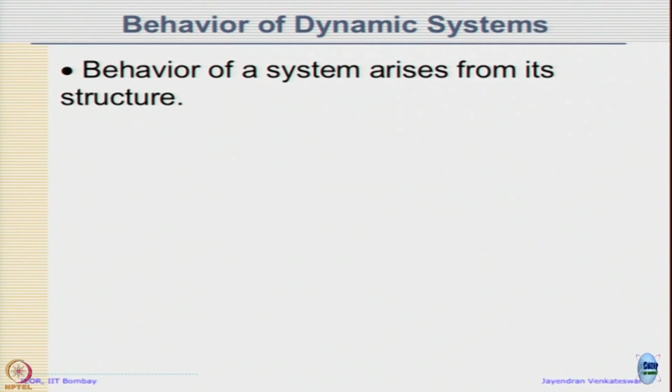The brief introduction I want to give today is on something called patterns of behavior, which is a follow-up on that. See, why we are trying to do system dynamics is because the behavior of a system arises from its structure. That is the fundamental idea we are trying out. We are not saying that the entire behavior of a system is exogenous. If you do that, then there is no need for solving any issues or trying to model a system.

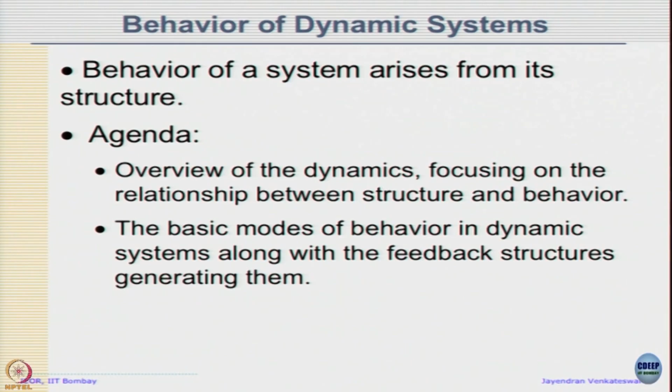We are trying to understand only because we know that the behavior of a system arises from its structure. So in this set of lectures, what we are going to do is overview the dynamics, look at what kind of dynamics actually are out there, how many types of graphs we can see, and based on that, is it possible to isolate or classify these dynamics. Surely people have already worked it out, and are there any generic structures in our causal diagrams that can be used to explain those dynamics. So that is what we are going to see.

Without much fanfare, these are the basic modes of behavior: exponential growth, goal seeking, S-shaped, oscillations, growth with overshoot, overshoot and collapse. Of these, exponential growth is very easy to imagine, and goal seeking and oscillations are very fundamental behaviors. A combination of these three is what results in other behaviors called S-shaped growth, growth with overshoot, and overshoot with collapse.

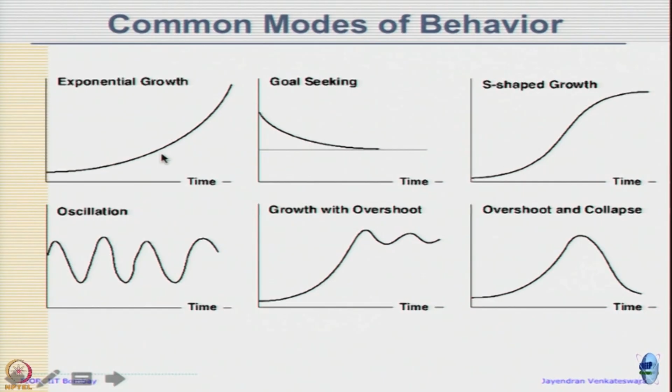That can be modeled using the same underlying structure that we use to model exponential growth. Let us quickly look at it. Exponential growth means there is a positive self-reinforcing feedback in the system. That means the state of the system is there and there is a net increase in the system, and that state of the system again contributes to the net increase rate, and that feeds on each other until it causes exponential growth.

A simple example could be, if you have a bank account, then interest keeps adding to the account and every year it accumulates. Though the amount may be small, if you leave it for 100 years, you will get a really large amount of money. So that is exponential growth. So the state of the system, if you plot it, you will get an exponential increase. It is common in many scenarios.

For example, if you are modeling the US GDP, the average growth rate is 3.45% per year and the doubling time is 20 years. US prison population, again as I told, if you draw the correlation it will be high, but that does not mean anything. Or world population, transistors per chip, or many other behaviors of biological systems.

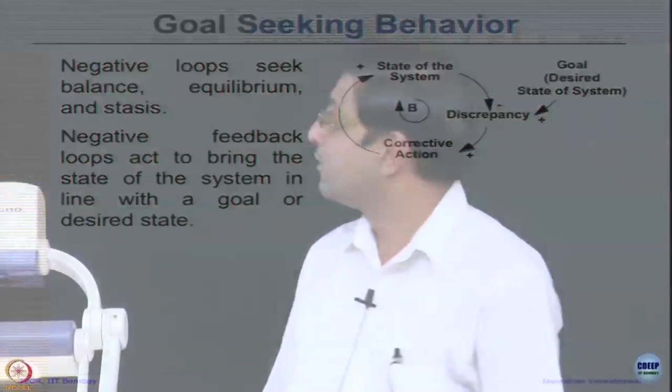So the general structure for goal seeking behavior is the graph we saw. Whenever there is goal seeking behavior, it means there has to be a goal—the title is self revealing. There is a goal, there is a desired state of system, there is an actual state, and based on the discrepancy I take corrective action, and I correct it until I reach the goal, whatever it is. So this negative feedback loop acts to bring the state of the system in line with the goal or the desired state that we want.

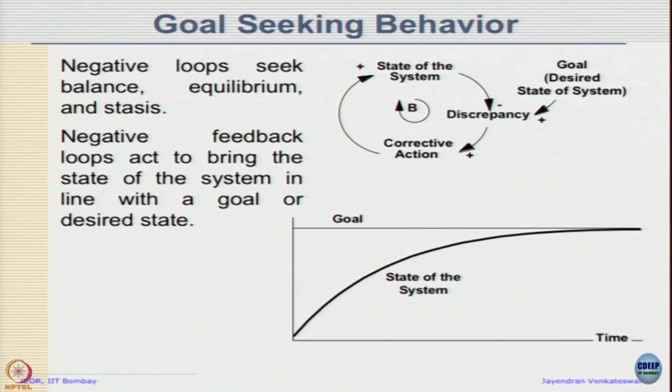It is quite intuitive, the behavior we can expect is something like this. The goal can be approached from the bottom to the top or from top to the bottom. There are nice examples, like semiconductor fabrication defect rate. If you model defect rate, it goes down exponentially—there is goal seeking behavior. Nuclear plant load factor can rapidly increase up to about 80% load, but after that it increases very slowly. Or television share of all advertising, or US traffic fatalities per vehicle. All these things show a kind of goal seeking behavior over time. Again, the x axis is time—we are looking at time changing behavior.

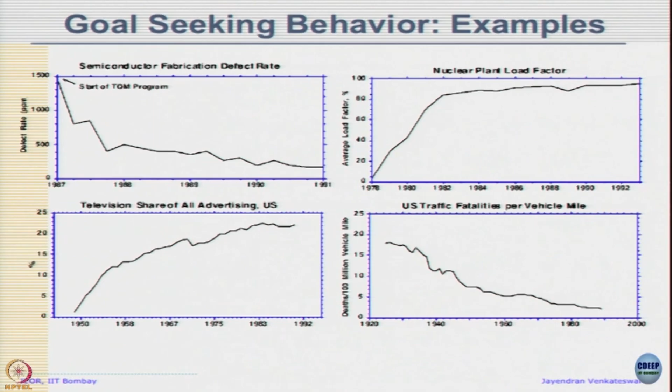The third fundamental mode is called oscillations. Like goal seeking behavior, oscillations are also caused by negative feedback loops, but something is constantly changing—that is what oscillations mean.

The very simple modeling construct that causes fluctuations is the presence of delays in the system. If you do not know the current state precisely, you assume something and take corrective action, and that action takes some time before it affects the state of the system. It also takes time for you to observe the state of the system, identify the gaps, and decide which corrective action to take. All these delays make us overshoot our goal, then go below the goal, then take corrective action again, go above the goal, etc. So we end up oscillating over time.

So overshoot arises from the presence of significant time delays in the negative loop. When you observe systems whose graphs show oscillating behavior, you should understand there are significant time delays involved. Let us try to identify those time delays—what is causing the delay, how we can reduce it, or just identify it. Right now we are not prescribing action, we are only trying to understand and discover what is happening.

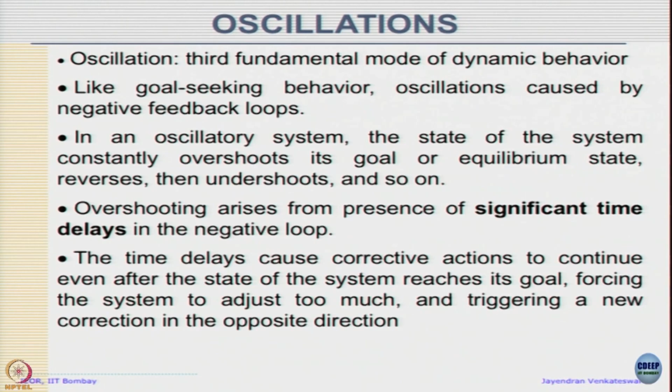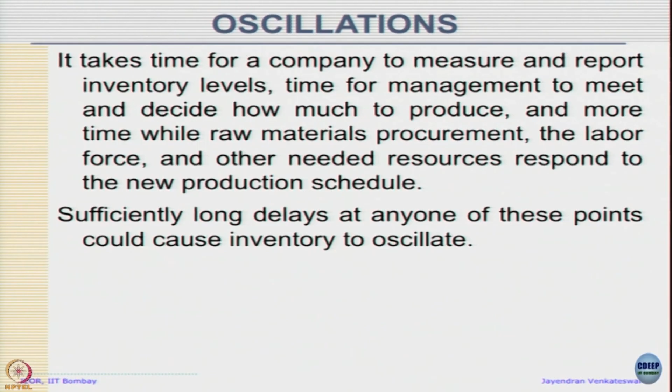If there are oscillations, for example, it takes time for a company to measure and report inventory level. Trust me, people do not have good inventory visibility. If you look at a warehouse, it takes a week or even a month to figure out the inventory, but during that month there are so many transactions, so the value you got is already redundant. Then it takes time for management to meet—managers meet two to three weeks later, make some fancy PowerPoint presentations, and somebody suggests a corrective action, memos are issued, and corrective action is taken. All these things involve a lot of delays, and the result is oscillations. Sufficiently long delay at any one of these points will cause inventory to oscillate.

So, the underlying structure is very similar to the goal seeking system, except that now there are measurement, reporting and perception delays in the system between the state and discrepancy. Between discrepancy and corrective action, there are administrative and decision making delays involved in the system, and between corrective action and state of the system there is something called action delays.

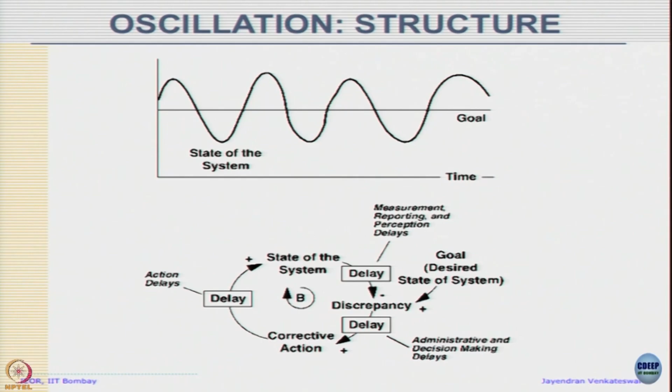Even if I say this is what has to happen, we do not do it. Even if an assignment is due tomorrow, yes, I have to work on it, you say, "Theek hai, abhi chai peeke aayenge." So, that is called action delay. There is delayed action, and then it will cause you to oscillate. And again, we are not trying to solve the problem, we are just trying to understand and model it right now.

So, these are the fundamental modes: exponential growth, a positive loop; goal seeking, a negative feedback loop with a goal; oscillations, a negative loop with delays. A mix of these can cater to more variety of behavior, more complex patterns, where there is a nonlinear interaction in the structure. For exponential growth and goal seeking, you will find that the underlying structure is actually a linear model. So, you can apply various linear control systems techniques to look at that.

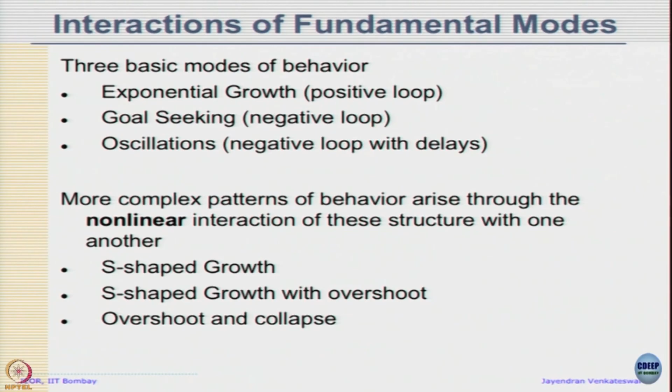But once the system becomes non-linear, you get more interesting behaviors: S-shaped growth, overshoot, collapse and things like that. Let us quickly explain what S-shaped growth is. No real quantity can grow forever, eventually one or more constraints halt the growth. A commonly observed mode of behavior in dynamic systems is called S-shaped growth. That is, growth is exponential at first and then gradually slows down. It rapidly increases and then slowly saturates or reaches equilibrium. It kind of resembles a stretched out S.

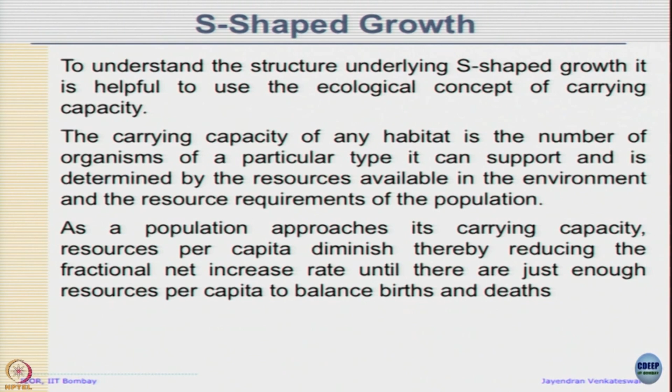So, one way to understand it is there is some sort of a carrying capacity in the system, or rather initially the system allows you exponential growth, after which some constraints start limiting its growth. Recall the land use example I talked about. Currently there is a lot of land, so people started coming, and as the land's capacity is used up, we can expect that the growth will cease at some point. So, that is what is written here. S shape, kind of a stretched out S.

So, the first part you can see here is exponential increase, at some point it starts to slowly saturate. Initially the positive feedback is active and grows the system very nicely up to this point, after which the carrying capacity of the system, how much the system can absorb, will start to dominate, and then it will decrease the overall rate of increase, which will allow the system to saturate at some point.

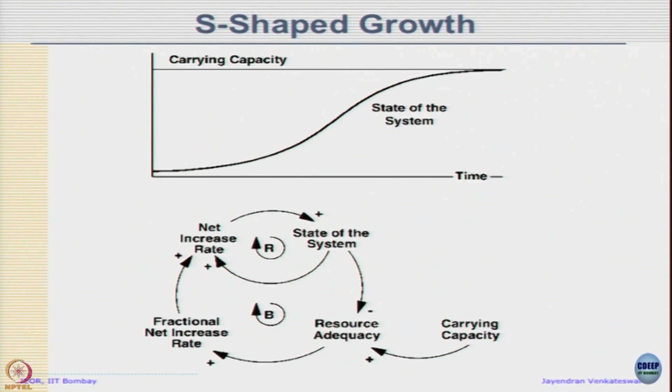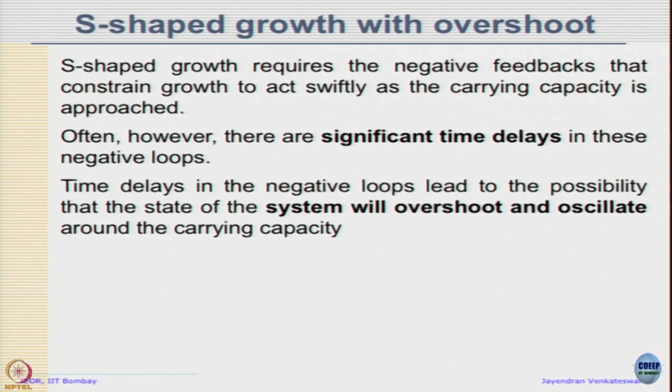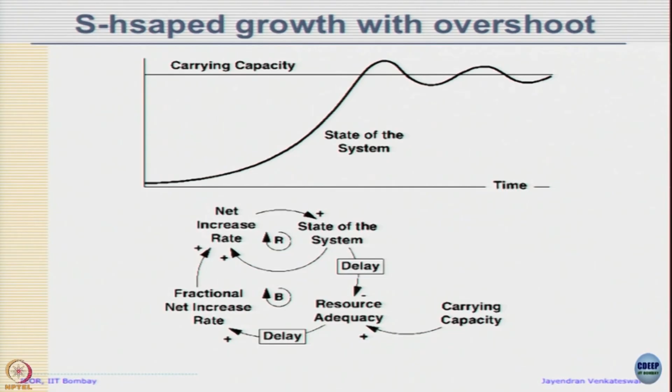If a delay happens, what will happen? We can expect some oscillations, right? This exactly will happen. If there are significant time delays in the negative loops, then you end up having oscillation because you will overshoot your goals, and then you have to take very drastic corrective action, and again it falls down. Very similar idea, exponential growth, again over the goal, but there was a delay before negative feedback kicked in, so it allowed you to overshoot, and then you take more corrective action, come down, and again you go up and kind of fluctuate.

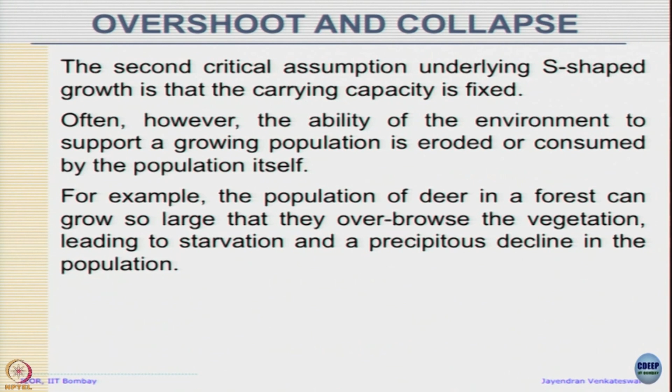Second critical assumption underlying this S-shape is that carrying capacity is fixed. If for some reason the carrying capacity starts eroding faster, you are not going to oscillate, you are going to come down crashing because the system cannot take it anymore. For example, a population of deer can grow so large that they overbrowse vegetation, leading to starvation and precipitous decline in the entire population itself. So the behavior could be it increases, goes above your capacity, starts to oscillate, but then rapid collapse happens.

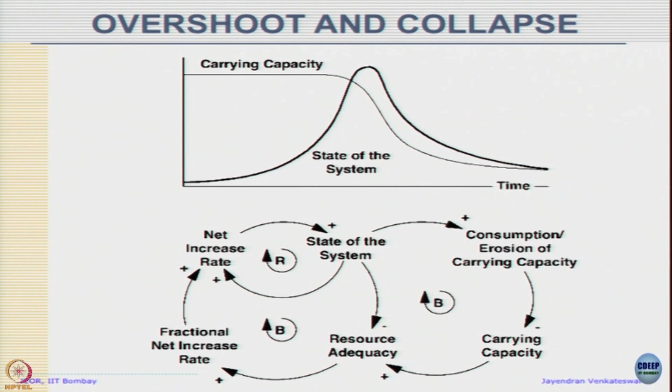So the left half is the same as what we saw a few minutes ago, but now the carrying capacity also is affected by the state of the system, consumption, erosion of capacity. So as capacity falls down, this loop becomes tighter. That means you actually reduce your goal. A nice ambition, but for whatever reason your goal itself eroded. So once the goal eroded, your entire system state will start following that particular goal, because this becomes a dominant loop.

So why care about these behavior modes? The principle that the structure of a system generates behavior is a very useful heuristic. So we can learn to ask the right questions. It helps the modeler discover the feedback structure of the system. When we see data and patterns of behavior, we can know what basic feedback structure might have been dominant at different points in time. If you see S-shaped, then you know there was some positive feedback sometime in the past. So what was enabling it?

Maybe it was a good administrator, maybe there was absence of rules, something else happened. But now it is kind of saturating. So is there any other dominant loop that is happening? It allows us to uncover what kind of dynamics could have occurred, which we will get only if we look at it over time. So math alone is not going to help you; just getting your correlations is not going to help. You have to understand what might have increased, what kind of links could have been there, and then work with that.

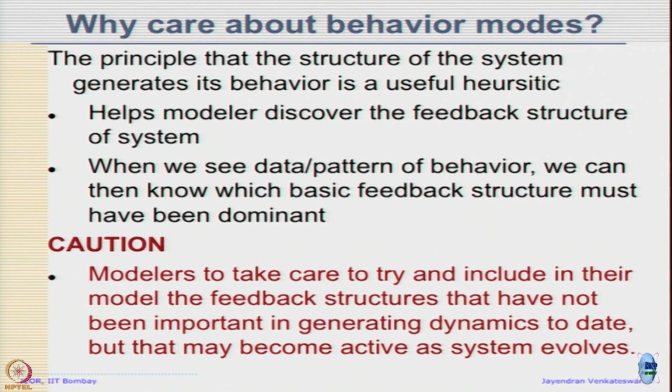Quick caution: if you're only looking at the past, then we don't know what's happening in the future. So that also has to be kept in mind. So I want to give this quick introduction because we will be revisiting this again and again, because in this course, from next class, we will model the positive feedback system, learn how to put in numbers and simulate it, see the properties, then simulate various kinds of goal seeking systems, whether you are able to achieve the goal or not.

And then we will start introducing delays within them and see if we are able to replicate these kinds of behaviors. Then we will do S-shaped growth, and more complex systems with a mix of all these behaviors. So it will be good for you to always come back to this and use it as a reference, because sometimes the model becomes complex with so many variables, but the underlying structure will be only this. We add more variables for completion of the problem, but the core structure will always come back to this.

So keep this as a reference, but we will be spending enough time with each type of behavior in the first half of the course, and in the second half we will start looking at modeling of systems, deeper analysis, more prescriptions and things like that.